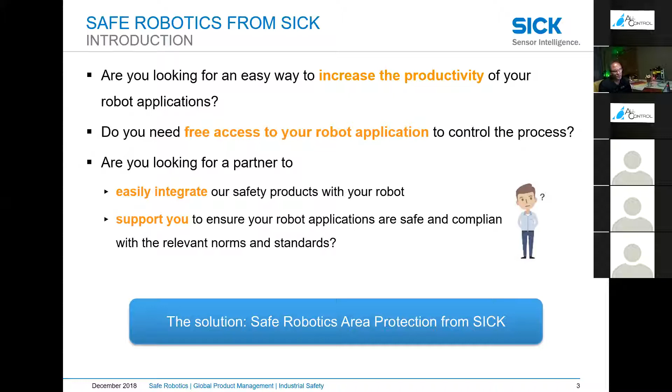What we're talking about here is primarily cooperative robots. In our world, people have the terminology mixed around. There's cobots, and cobots typically use speed and force monitoring - those are the ones that work directly with people, where you can touch the robot. That's speed and force monitoring, and we work with those as well, so the system is applicable for cobots.

Cooperative robots are the main focus, and that's 90% of the robots on the market. Those are your industrial robots that share a common space with an employee, and we'll show that. Then there's coexistent robots, and those are the ones Jim was referencing in his opening - you put gates around them. It's kind of like living with my daughter downstairs, we coexist: you don't want to go in her room, and she doesn't want to come in mine. That's the coexistent robots, and that isn't so much the focus of our discussion today.

So we're primarily focusing on cobots and cooperative robots. Some people get it confused and think we're only talking cobots or only talking cooperative - no, these systems are designed for both of those styles of robots.

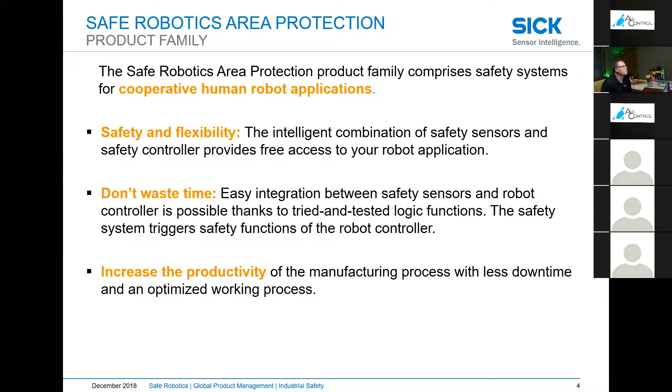So today there's a couple different kits that we've put together. In our world, we talk about sBot, remembering sBot is Safe Robotics Area Protection. There's a stop, which is brand new, and it's generic - for most general robots on the market that may not have speed and force monitoring, or safety rated speed monitoring. They just have a stop function, and if somebody walks into the cell, you want the robot to come to a controlled stop, and stay stopped while a person's in the cell. That's called an sBot stop. And when it's called generic IO, that means we're using just inputs and outputs.

Then we jump into the speed family. So there's two families - stop and speed. When we get into the speed family, we also can say it's speed with general IO. That means you don't have a safe network, you're just using inputs and outputs, which is what I'll be showing in my demo here.

And then we have, still in the speed family, UR. That's a kit specifically designed for cobots, and it's called UR because all of the e-plans and all of the documentation are specific to the UR robot.

And then one of the next new ones, and why I highlight these four is because they're all different, is the sBot Speed FA, which means FANUC. So it's designed specifically to work with FANUC. What makes it work with FANUC versus others, really, is the instructions. You write up the instructions, and in this case, it's going to be that they're using EtherNet/IP safety. So they're going to be over the network - we're going to focus on that a lot.

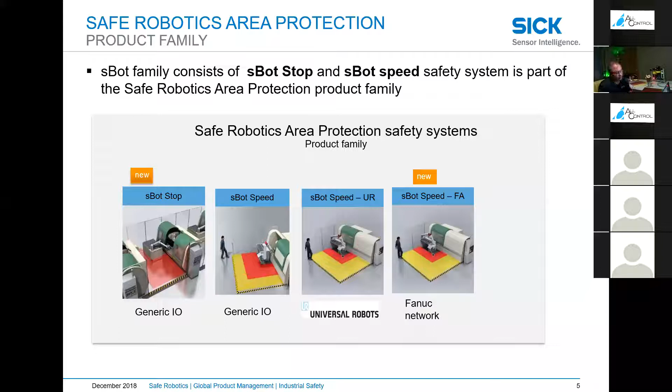There'll be an sBot Speed YA, that'll be a Yaskawa. You can get an sBot Speed IO, which is this one over here - if you don't have one of the main brands, most likely the generic IO version will work for you. So we've got them set up for generic, and we've got them set up for very specific robots, as you'll see. It's a really nice kit, especially even if you just have a generic, any type of robot out there.

So one of the first variants, this one's not the most exciting - it's your traditional way of stopping a robot. This is called the sBot stop. You'll see that there's a light curtain at the entrance to the robot cell, and then there's a laser scanner inside the cell. The light curtain is your primary protective measure, and then you've got the scanner inside monitoring so your machine doesn't restart while somebody's inside the cell. All of the logic for these is done in a simple logic controller that doesn't even require a computer - all the logic is inside this little relay here.

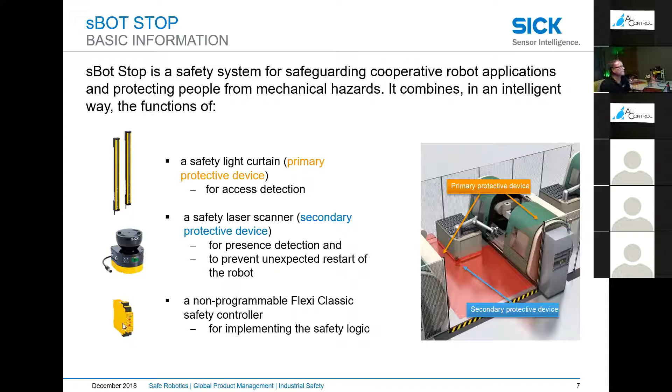You can get these set up with a manual restart, which is the traditional way of safeguarding a robot, but you can also get it with automatic restart. That's why you've got a safety laser scanner inside the cell that's monitoring it - if somebody's still in there when somebody enters the cell through the light curtain, the logic stops the robot. If they're still inside, it keeps the stop. And then when they exit, you've got a choice: either they push the reset button, or you can have it automatically restart.

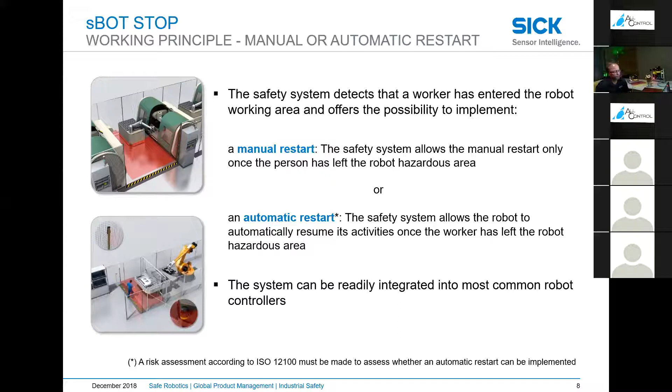What we're showing here is that we're combining a bunch of our technologies. We have the safety laser scanner, a light curtain, plus the controls, and your logic is inside the controls. We also include instructions for the system so that you're not going back and forth - oh, I need to read the instructions for the safety scanner, I need to read the instructions for the light curtain, I need to read the instructions for the controller. We put that together into one set of instructions for the system, and we ensure that the system meets Performance Level D, which is the safety rating for the robot cell as a system.

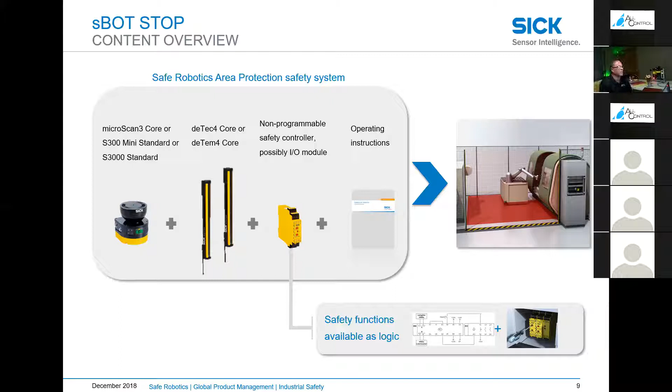And every robot would have a protective stop, should. This would be your most simple way of safeguarding a robot cell. And then it would be just a stop, and then when you exit, you restart.

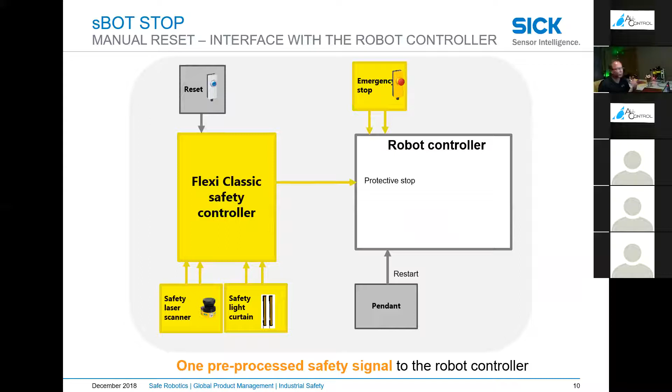If you wanted to step up to having it be automatically reset, then you have to look at your robot controller and make sure it's got an emergency stop and a protective stop. So somebody pushes the emergency button, it goes into the emergency stop function, and that is not an automatic restart. But if somebody enters the cell properly, comes in through the light curtain, is in the laser scanner area, and then exits, the system knows that everything is clear, and the robot can automatically start.

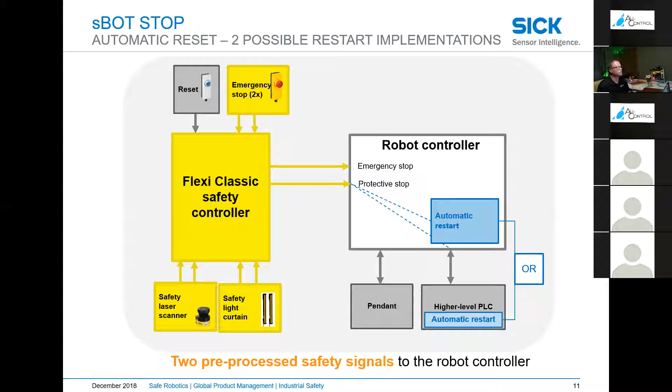So the idea here is that the safety functions are available through pre-engineered and tested safety logic. That's really important. You simply select the correct program on the Flexi Classic, and you're up and running. So these are really easy to get up and running. They're reliable, performance level D. You get detailed documentation for the system, not just each component, and it'll work with most industrial robots.

So this is just your basics, sBot stop is just the basic system, and it's more the traditional way of doing robotics. You could do this all day long. The nice thing about buying this kit is it doesn't cost much, and you know that it meets performance level D, and you didn't have to do the logic.

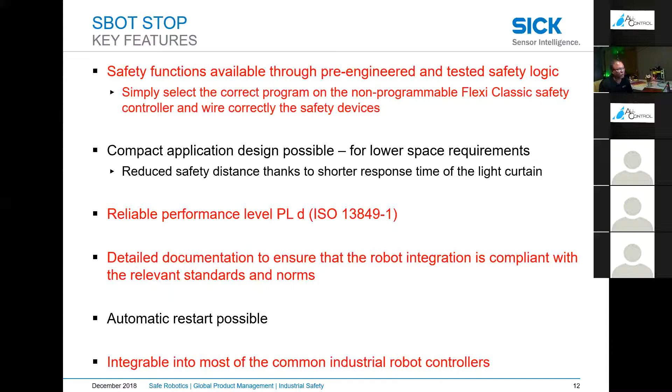When I talk to big companies, those are the things that they like, that their robots are all going to act the same because they all have a baseline of logic built in, and they don't have to worry about, hey, I've got 10 different integrators and they're all programming my robot differently. So each robot acts a little different.

So what we really want to talk about, which is way more exciting, is the sBot Speed CIP FA FANUC. I chose the FANUC because it's the latest one that we released. And keep in mind that this will work on other variants, but this one, because it's using EtherNet/IP safety, that's the newest and latest and greatest safe network. And FANUC's a good manufacturer, so it's a great one to spotlight in this demo.

Do you have IO, or did you buy the DCS, which has the EtherNet/IP safety? Yes or no? Oh yeah, I've got the EtherNet/IP safety on mine. Perfect, we're right into our sBot CIP FA, and I know that we can integrate directly to it. If you have a different robot or a different model, you just let us know what you have.

But those are the basic stuff that we typically would want to know: do you have IO or do you have EtherNet/IP safety? Same for Yaskawa, usually you'll have the DX200 or the YRC1000. It's either going to have IO, and usually the EtherNet/IP safety can be an option, so I don't always know if you have it. You may need to know that. And if you want to go with EtherNet/IP safety, that's something you're going to want to be able to tell me, and we'll be able to integrate right in.

If you've got a UR robot, we've been working with UR forever. Keep in mind, UR is mainly a cobot, so they'll use their speed and force monitoring. But the idea is when they combine it with our laser scanners, then we use distance and speed monitoring, so that when you walk away the cobot can go into full speed, and then when you walk up to it, the cobot goes into its collaborative mode. That's the idea. Otherwise, the cobots are so slow that you can't get any production out.

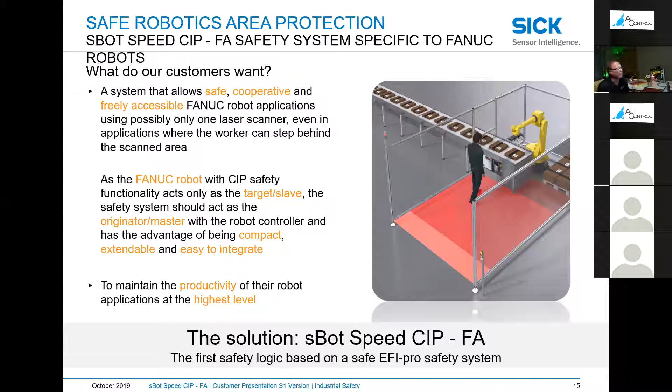One of the most common FANUC robot controllers is the R-30iB. A lot of times you'll hear, hey, do you have DCS? That's their Dual Check Safety. They've had it out for a while, and that's what they call their safety system, which has the safety-rated speed monitoring, the safe stop and the protective stop.

And then if you've got the DCS, the next option that you can buy is usually the EtherNet/IP safety. So if you have DCS and EtherNet/IP safety, those two words mean a lot to us. You've got a really nice case for putting in one of our canned solutions, which I'll be showing you in more detail.

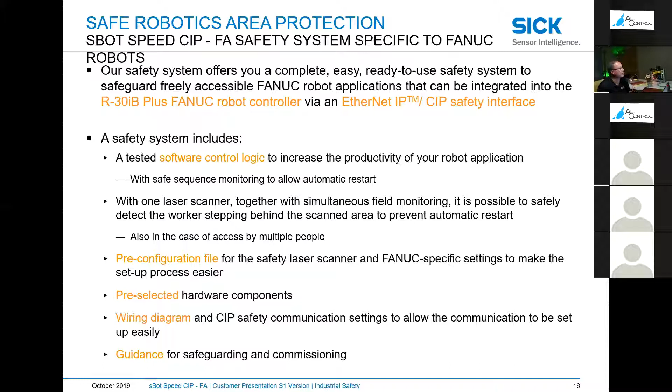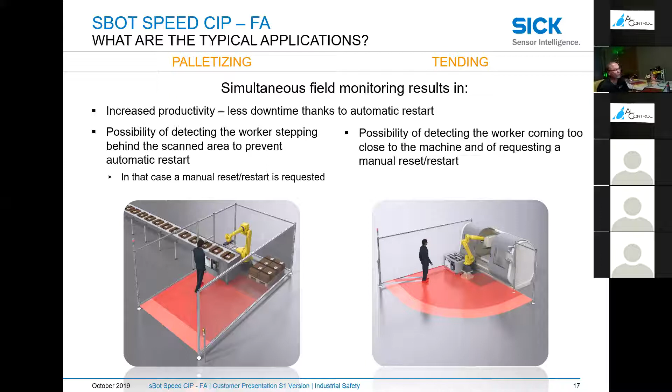And then when you exit, you have to check the cell and then push your reset, which would be your normal way of resetting. So we keep beating on this a little bit: unlimited free access, simple and low cost. When you go with EtherNet/IP safety, the nice thing about it is this is your wiring. Literally, all of your I/O is over your Ethernet cable.

I have one set up in my lab. I'm not a PLC programmer, and even I can make these things work. When you see the software, it's really well written. You'll find that it's reliable. And if you've got a plant that's putting in a lot of FANUC robots, the big draw to the end users, like the Unilevers and Nestlés, that they tell me they really like, is that the system comes with a baseline program in it.

So all their robots, if they're rolling them out across 400 plants, at least have common hardware, common software, and common functionality. You can build on it, but at least you have a baseline. So that's what we're talking about, being flexible and future-proof. These things are not locked down. The program's not locked down. You can build on them, you can keep adding, and you can even be deducting, but the base program is already set for you.

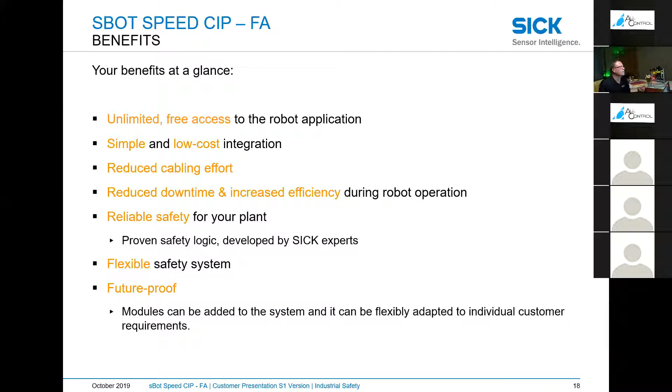So what does the system look like when we jump into EFI-pro, which is our name for EtherNet/IP safety? So we've got a controller in the middle. You've got a laser scanner in the cell, and then it's communicating to the robot, to the FANUC robot, over EtherNet/IP safety, which is the safe network, and the robot is communicating back both on the EtherNet/IP safety, but it's also communicating non-safe data via EtherNet/IP.

So they're communicating back and forth, so that the controller is telling the robot, hey, this is what my laser sees, and the robot saying, got it, I've slowed down, and then the scanner says, okay, so now I don't have to look so far. So they're communicating back and forth, and making it so that you can work closer and closer with your robot and still get productivity out while staying safe.

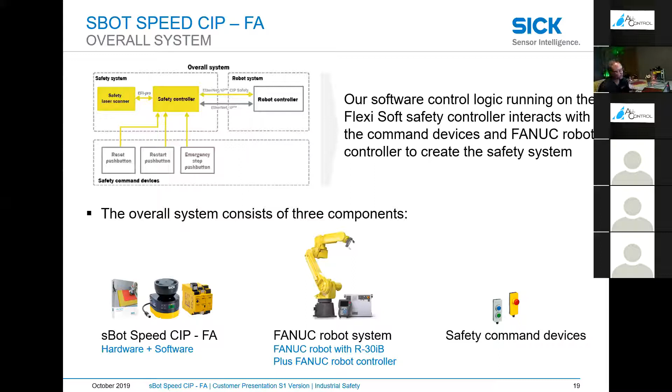So what do you get? There's a couple different things you have to buy. So you buy a software package. Your software package will include your laser scanner program, your safety controller program, your Sistema files and your wiring diagram, etc. Then you buy your hardware kit, then you get your operating instructions. You'll get your laser scanner, you'll get the right program, your right CPU, the right gateway. So you get all the right stuff. You're not guessing, oh shoot, did I buy all the right accessories? It comes in a kit.

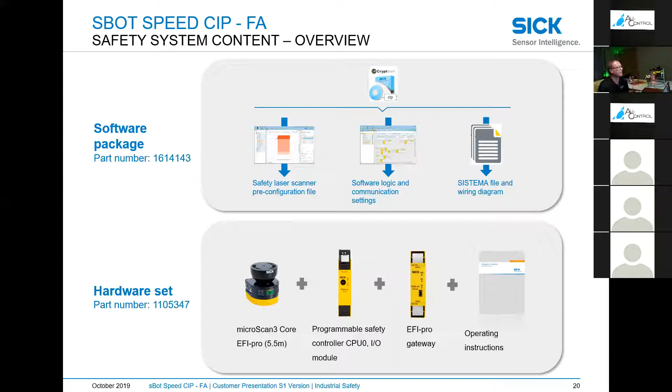So here's going to be a homemade video that I made, just showing the concept of my demo right here.

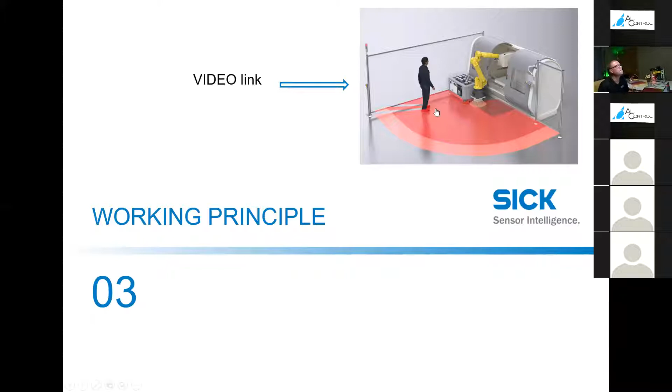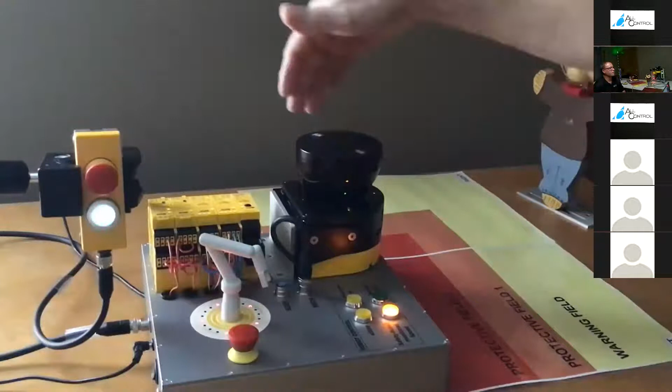Today we're going to be talking about an sBot. So what is an sBot? An sBot is a safety robotic area protection kit. It combines a bunch of our technology into a comprehensive safety robotic kit. So it includes a safety laser scanner, safety controls, whichever controls would be applicable for your robot. You normally have the e-stop and reset buttons incorporated in. It has the program for the laser scanner, the program for the safety logic, which is specific to your robot.

But this is called an sBot Speed because it has custom function blocks built in. So if you notice here, I have a yellow zone, which is my warning zone, which is my slow down zone. I've got a protective field 1 and I've got a protective field 2. So the idea here is that your robot can have free access to it, and the controller has built-in logic so that when a person enters the robot cell and they get into the first warning zone, it uses speed and distance separation as a safety measure. It sends a signal to your robot to slow down. You notice that your robot now is going very slow.

That takes this protective field and it shrinks it because it gets feedback from the robot that says, hey, I'm slowed down. So now my person can work around the robot much closer because the robot is moving slower. If the person gets too close to the robot, it still stops. You can see that it stops, and the person does his chore, and as he backs out and gets into the warning zone, the robot automatically starts back up. That's why it's called an sBot Speed. It has sequencing built in. And as he backs out further, when he exits the cell, the robot automatically goes back to full speed without the need of pressing a reset button.

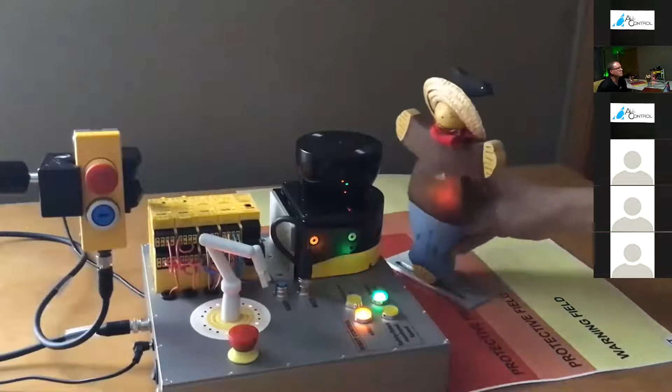So you say, well, what happens if he breaks the sequence? So the person comes into the cell and he's working around and something drops and he goes into the protective zone. And if he breaks the cycle, you'll notice that my reset button comes on and the automatic restart is gone. So then when he leaves the cell, he has to physically check the cell to make sure everything is okay and push reset. So that's what the custom function block is doing.

It's doing the sequencing. Once again, it allows the person to come into the cell. The robot slows down, allowing him to work around the cell. And when he gets closer, it stops. And then as he exits, it goes back to slow speed and then ultimately back to full speed, increasing your productivity. So that's at the heart of the sBot Speed.

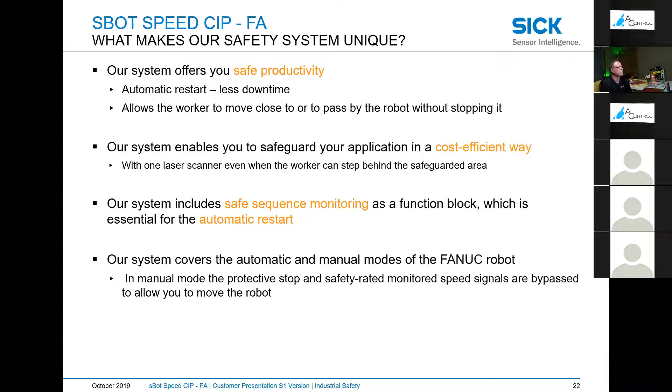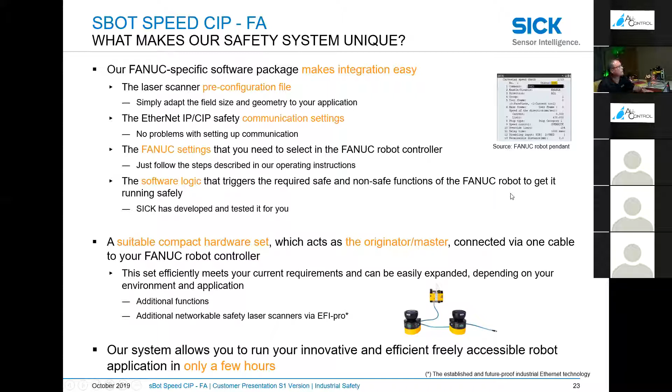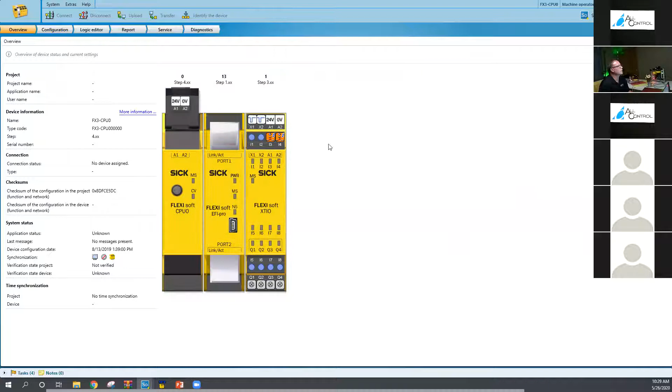So we do this. I want to exit. So what I have on the screen now is what you would get when you buy this sBot Speed FA. This is the file that you would get downloaded from the internet. So what's under the hood. This would be your hardware set. You can see you have very limited I/O. The only I/O you have really are your reset buttons and your e-stop. All of your communication to the laser scanner and to the robot are done over this, what we call EFI-pro, which again is our EtherNet/IP safety module.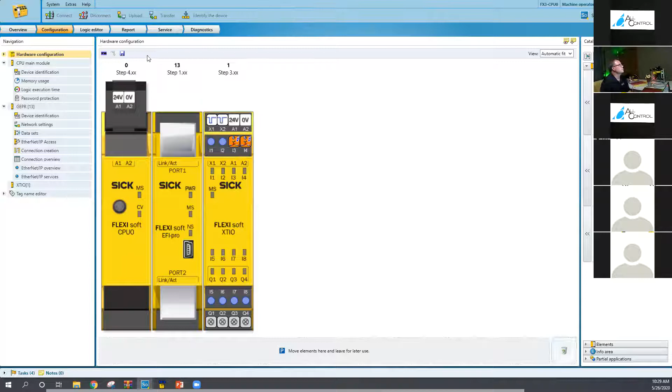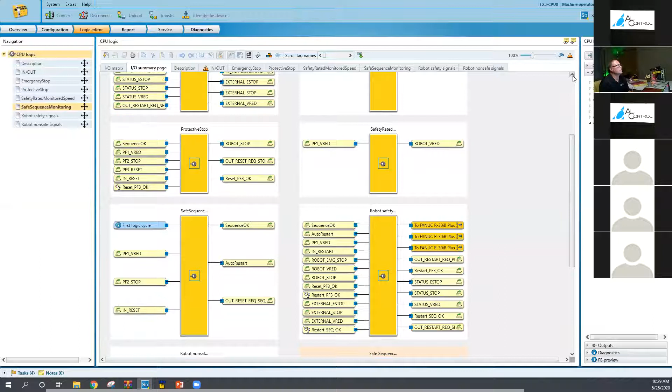So this is just showing the next configuration screen. So in the logic, let's jump into this real quick. You'll be able to see that this is the logic that is written for you. I just simply downloaded this from the internet. This is what you get straight out of the download. So you've got your I/O data. There's your I/O summary, giving you your inputs, your in and outs, your protective stop, your safe sequencing, your robotic safety in here. This is just an overview page of what's going on under the hood. The description is just your disclaimers.

On the next tab, they really did a nice job breaking out the software and giving you notes, inputs from the safety laser scanner, discrete inputs from your XTIO. This is nothing that I created. This is what you get when you download the software. And this is in the safety controller. What does my emergency stop look like? In and out, sending my signal to my robot. What's my protective field? So you can see, I like to show people what they're getting.

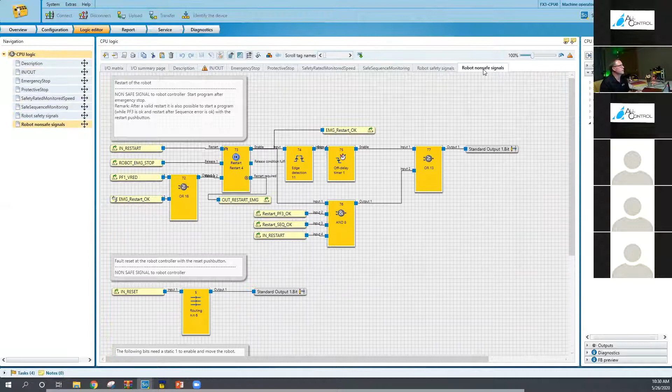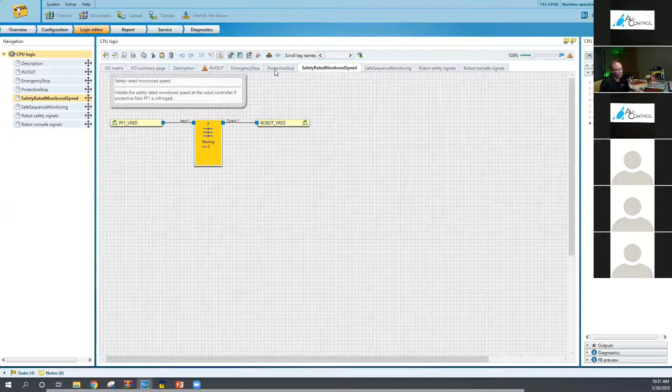The software is, I think, maybe $1,500. If you had to write this program and do it correctly, you could spend days getting it right, and then you would probably need to run it past a safety engineer to make sure that it meets all the right standards. So the beauty of it is that this software is written to meet the RIA standards, and the system is set up as a performance level D, which is what you need for your robot.

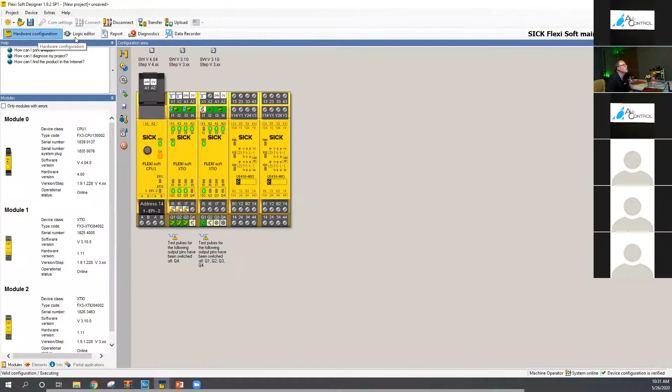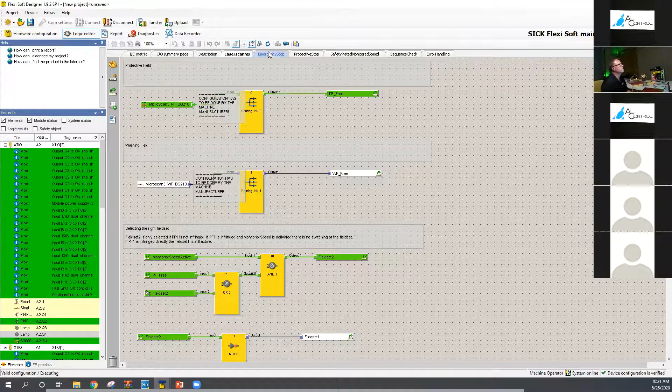Let's see if I've got one here. Should be ready to go. So this is my actual demo running. When I open the logic, it opens in a different screen. So in here, you just see things happening. So if you are live, you can see emergency stop. That's just showing my robotic system live.

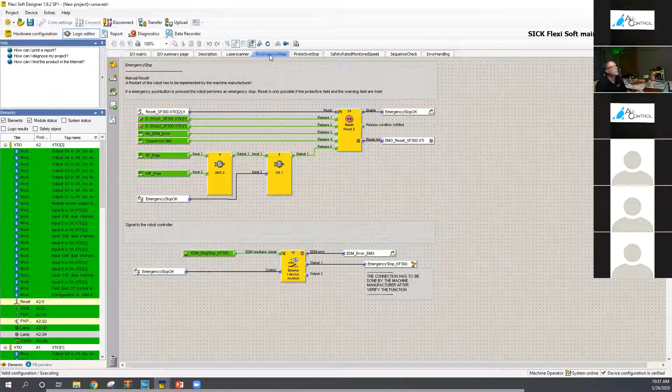So I know we're at about a half an hour, so I wanted to open this up for discussion. I'll do a quick demo of the system. So I'm going to stop sharing my screen. One quick, yeah. So stop sharing my screen.

So what I have going on here, this is my sBot. This is the robot. And just like we showed in the demo of the video, your person walks in and my controller knows that somebody's in the area. The robot slows down. It allows him to get really close and work around the robot cell.

This is an I/O unit. That's why it has so much I/O, because it's sending signals back and forth to the robot and monitoring speed. It's having the robot monitor speed, but getting feedback that it's going slow and that it's slowed down, that it's a protected speed, that you're in sequence. There's a lot going on inside there.

This one I have set up because this would be exactly what you would get if you went over EtherNet/IP safety. And that's really the way; if you can go that way, I highly recommend doing EtherNet/IP safety. So with that, I just wanted to show one thing here, just to give you an idea. Yeah, I forgot one thing.

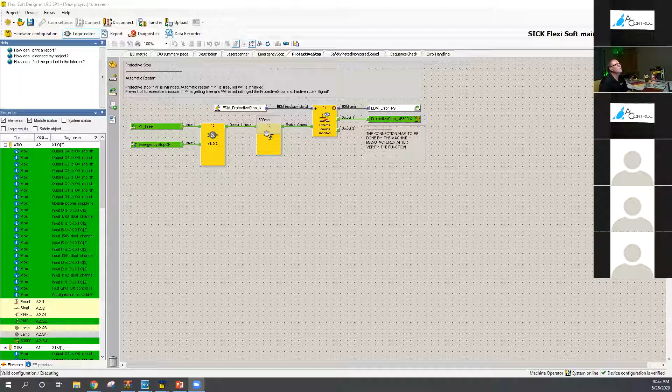So you can see my screen again. We were talking about how with EtherNet/IP safety, everything is in one suite. That's the other thing that's nice - you don't have to have a Rockwell PLC over here, a FANUC controller over here, a SICK laser scanner over here, and 3 different softwares. Everything is in one software suite.

So here's my FlexiSoft controller, here's my safety laser scanner, here's my FANUC robot. And when I was saying we make the connections for you, we literally make the connections for you. This is what your architecture would look like. We make all these connections, and then you just set up your communication, you set your IP addresses and so on. We literally do 90% of the work. There's a little bit that you have to do - you have to establish your e-stops, set your IP addresses and things like that. But it is really a nice setup.

So now with that, we can open it up for questions. I think we're right at 10:30.

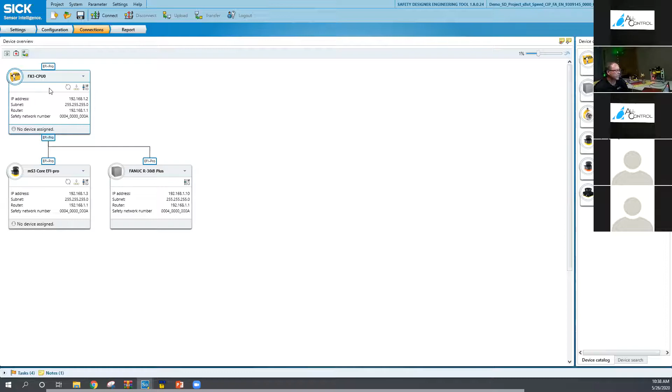We do it all for you, and we do it all over the network. Now, if you have like a Rockwell system platform, we communicate to that if you want to - we can show it on here. Our controller has 2 ports on it, the EtherNet/IP safety, so it can communicate to the robot, can communicate to the laser scanner all over the network. And if you wanted to, you could send informational data to your Rockwell PLC over Ethernet IP as well. So it's a very versatile system, and we include it all as part of the package - you don't have to buy anything separate.

That was a great question. Yeah, I think one good thing maybe to point out too is that obviously there's less connections - it's maybe even a simpler system. You have the CIP Safety, and SICK has that capability, but your robot or your PLC controller would still have to have the capability to talk on that network as well. Right, yeah, that's the assumption - if you have Yaskawa, KUKA, FANUC, those - I think all 3 of those work over EtherNet/IP safety.

Then that's when you would use this system. It's really nice because you have your CPU, and then this is your cloning module, so if anything ever did go wrong, your program is backed up. And this is your EtherNet/IP safety module.

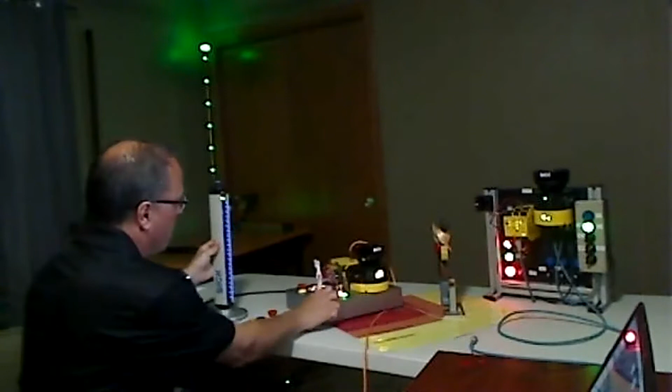Okay, well if anything does come up, we'll be reaching out to you. Hopefully we got something out of this, and now we're figuring out how to safeguard everything in our plant and any kind of robots we're looking at. But if you think of anything, please feel free to reach out to All Control, and we can help.

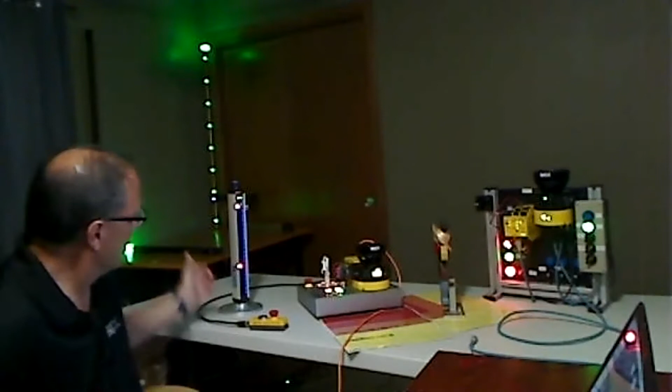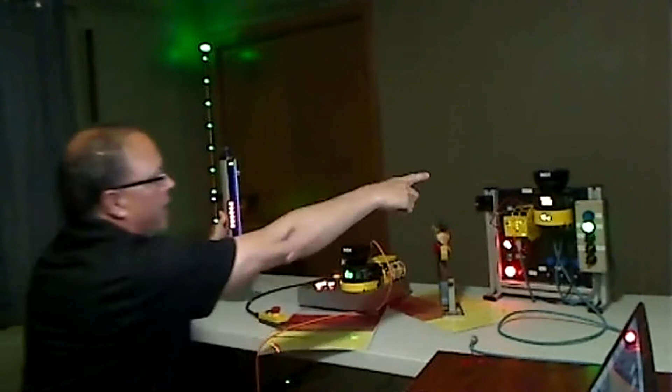There's one other quick thing I always like to point out. People always ask me, Russ, how do I find my laser? We have a little tool here designed to pick up infrared laser light. You can see I'm picking up that laser and this laser. That one's actually hitting here.

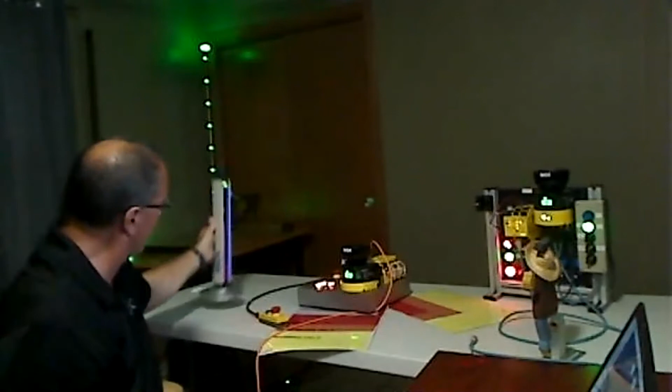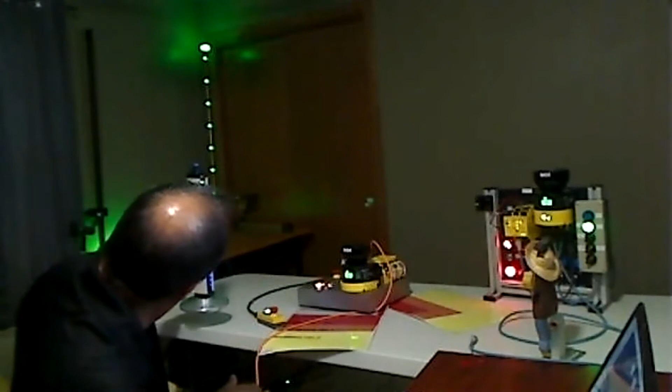It's a nice little tool, all battery operated, rechargeable. The idea is these lasers typically are mounted 300 millimeters off the ground. How do you know where this laser beam is hitting, especially when you're out 9 meters? This is just a tool we use, and it's got a little measuring stick on it, so you can set it at 300 millimeters and make sure your laser is hitting in the right spot. You can see that top one is hitting right where I want it to be hit.

Oh, you probably can't see that, but it's just a tool we have that I wanted to point out, that people ask about quite often. They're not super expensive, but it's nice to have in your plant, or if you're doing validation, you certainly would want to use one of these.

There, now that I got my mess all going here—that's what we have for today.